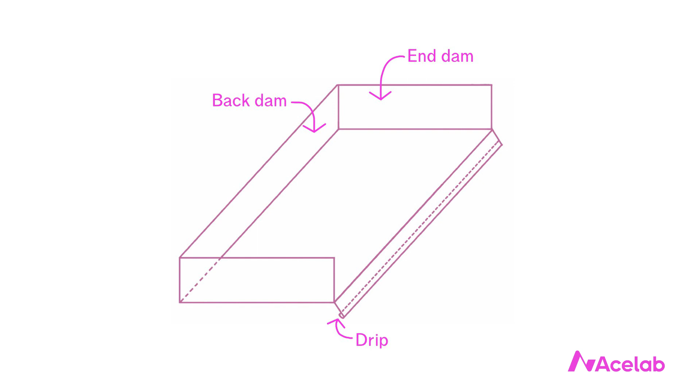First, what is a metal sill pan, and why do we use it when detailing windows? A metal sill pan looks approximately like this. It's a shape we make out of metal. Usually we make it out of a single flat sheet of metal that we cut and bend into this shape. The parts that we bend are obviously continuous and watertight, but the parts that we cut obviously are not. We usually smear these metal to metal joints with sealant, or we solder them to make them watertight.

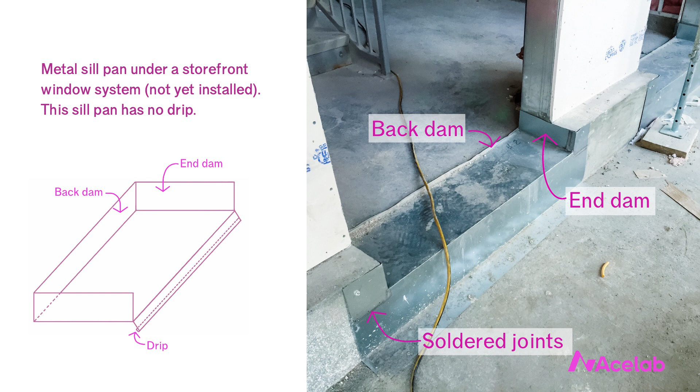What we're left with is a pan of sorts with a back dam, 2 end dams, and a drip edge. We place the pan into the bottom of framed openings before installing windows. Sometimes if our window is flanged, we won't have that angled drip edge. That outermost bend in the metal will just sit flat, flush with the sheathing.

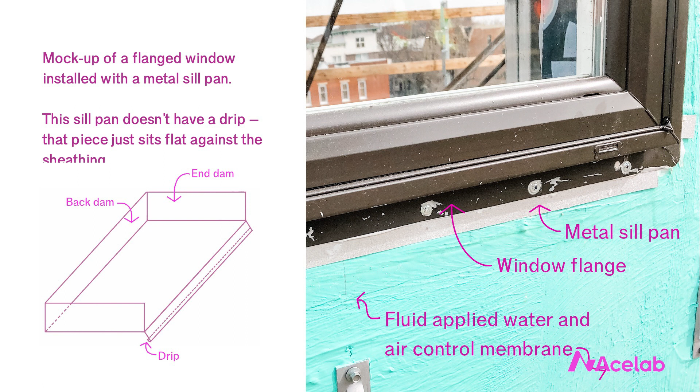The purpose of the metal pan flashing is to protect the framed opening at the sill from water damage from a leaking window. This is a really important distinction to make. This is about the opening, the window to wall interface, not the window itself. If windows didn't leak, we would not need to protect the framing from water damage. But windows do leak, and it's silly and unproductive to pretend otherwise.

Window manufacturers, even of high-performance, expensive windows, don't actually claim that their windows don't leak, at least not formally. What they claim, accurately, is that their windows meet certain water holdout performance criteria when tested in a laboratory. And that is a very different claim. Windows have a lot of complicated internal joinery that's difficult to seal even in factory conditions. And this same joinery can get stressed during transport to the job site and also during the actual installation of the window into the rough opening.

Even after the window has been installed, it sees a lot of abuse in service. It'll be exposed to wind, rain, UV, birds. It's not unreasonable to anticipate that any one of these things would cause a window to leak. And that's just the window itself. The window to wall interface can also leak. Windows are installed by real people who don't always do their work absolutely perfectly. We're installing windows in openings that aren't framed perfectly, using materials and methods that are sometimes a bit unfamiliar to us, in conditions that are sometimes difficult and unpleasant, like wind and rain.

And even when we get that window to wall detail right, what are the odds that it will remain perfect throughout its entire service life? A service life that, let's be honest, never looks quite like the laboratory conditions that we tested the window to originally. The best details and the best architects anticipate all of this. They don't depend on perfection in the manufacture, installation, or maintenance of the window, or in the environment to which it's exposed.

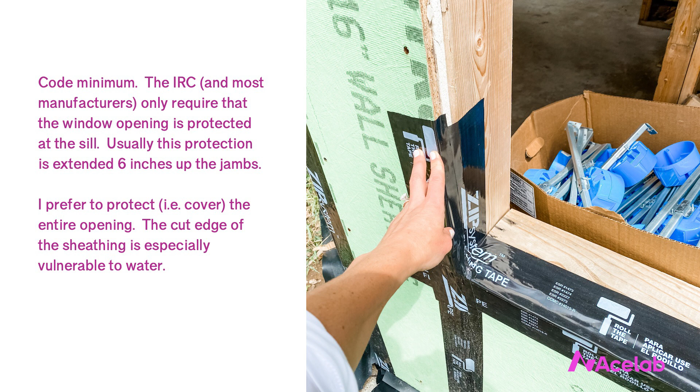It's worth noting here that the building code currently only requires protecting the openings into which we install windows at the sill, and the language about how we go about doing so is pretty liberal. Along the same lines, manufacturers, both of windows and of water control membranes, tend to stick with this minimal recommendation of protecting just the sill. This is fine as far as a minimum standard goes, but I recommend protecting the whole opening from water. While the sill is certainly the highest risk spot, the whole opening is vulnerable, especially the cut edges of the sheathing.

As an aside, protecting the whole opening is also beneficial from an air control perspective. In North American construction, we're often using the water control membrane over the sheathing to also control air. Bringing that membrane to the interior on all four sides of every window opening facilitates continuity in our air control system. And that has all kinds of other efficiency and comfort benefits. But that's a bit beyond our scope today. Back to metal sill pans.

Do they work? Yes, they've worked for a long time. But I submit that using a flexible membrane to form the shape is easier and less risky than forming the shape with metal. This is a complicated shape to form, and even when we do a reasonable job of it, it still has some pretty big drawbacks. For one, a metal sill pan will always be smaller than the opening into which we install it. It has to be, otherwise it wouldn't fit.

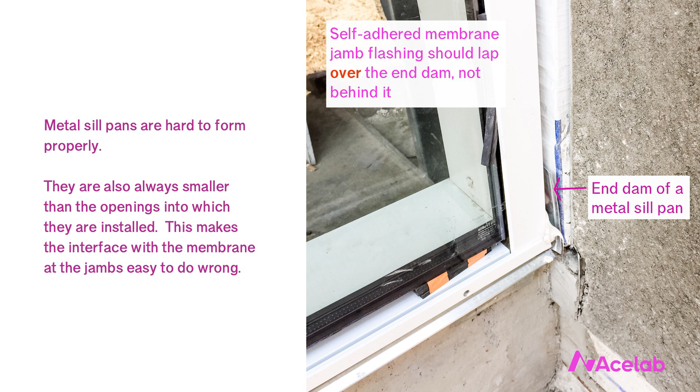The problem with that is that it is very common to forget to lap whatever we're doing at the jamb into the sill pan. It's very common to instead drain the jambs behind or under the metal sill pan, which of course defeats the purpose. A membrane sill pan, by contrast, tends to be more forgiving.

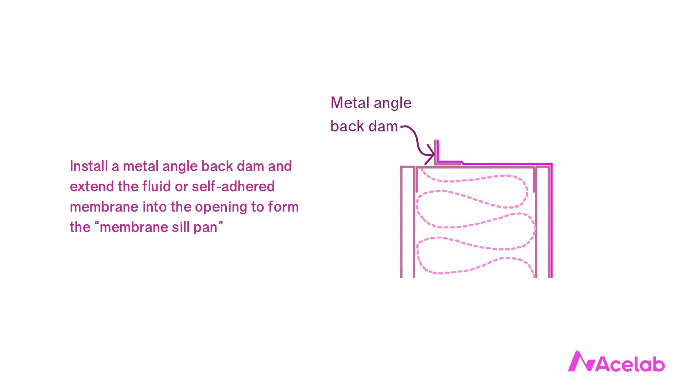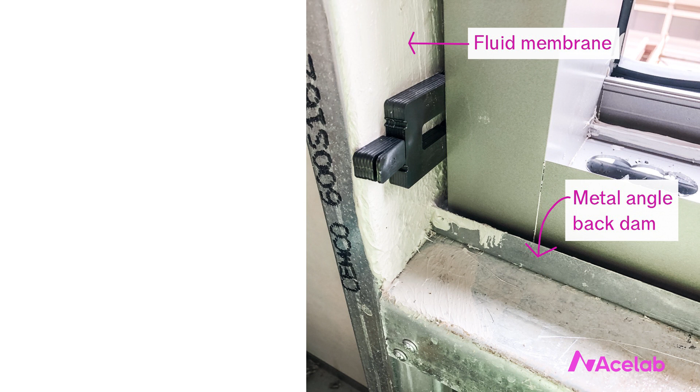We first install either a metal angle or a wood nailer into an opening at the sill to serve as a back dam. And then we use a membrane to form essentially the same shape as our metal pan flashing. The difference is it tends to be much easier to conform to the actual geometries of the opening with membrane rather than metal, and the jamb flashing and sill flashing can be continuous.

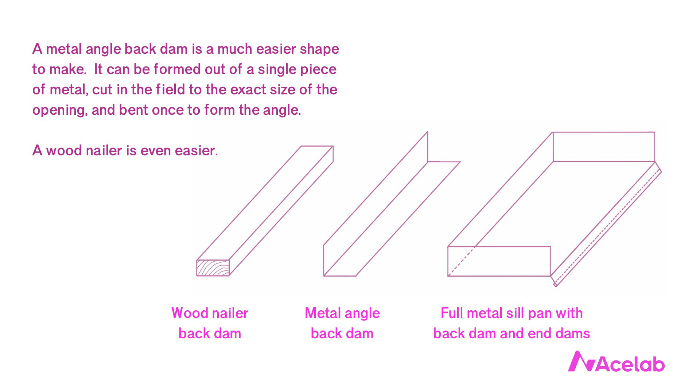Note that metal sill pans are often fabricated off-site. A metal angle back dam is an unbelievably easy shape to make, and it can be made on-site by taking a single piece of sheet metal, cutting it to the exact width of the opening, and bending it once. A wood nailer is similarly simple. The risk reduction by itself is worth it in my opinion.

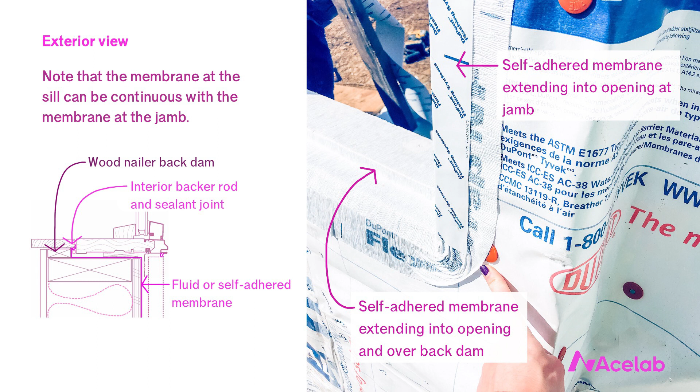But if you need more reasons to like membrane sill pans, they also facilitate better air control continuity because when we install our interior air seal at the window, it's between the window frame and our membrane air barrier rather than the metal sill pan. We also get to eliminate one more thermal bridge.

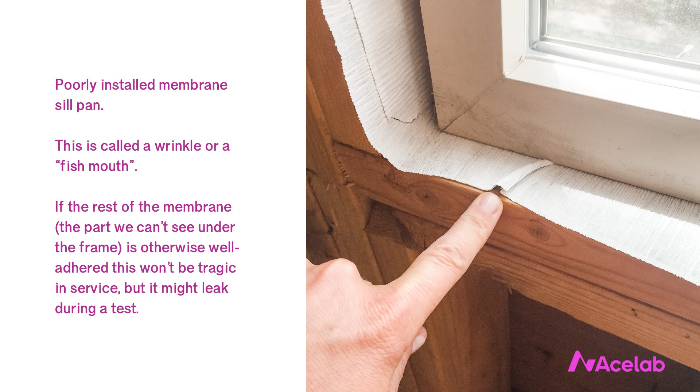All this said, membrane sill pans are not magic. It is, of course, possible to install them poorly too, and there is no question that a competently installed metal sill pan is far superior to a poorly installed membrane sill pan. But I do think it's important to note here that there are a couple apparent drawbacks to membrane sill pans that are, in my estimation, exaggerated.

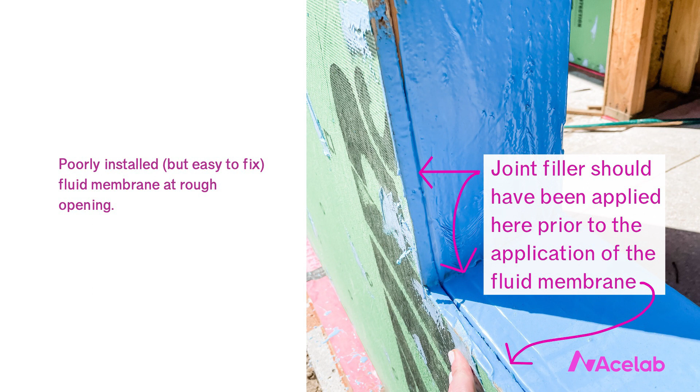The first is that the membranes we might select are incapable of spanning the small gaps in the framing. For example, the joints between the cut edges of the exterior sheathing and the wood studs. Before I ever saw fluid membrane used on a real project, that's exactly what I thought. I was comfortable with the use of self-adhered membranes. We use them to bridge these kinds of small gaps created by changes in substrate all the time.

But intuitively, it just didn't seem like a fluid membrane could do that. I guess maybe I was thinking of like regular paint, but our modern fluid membranes are manufactured specifically for these types of applications, and they're great at spanning these types of small gaps.

Depending on the fluid membrane you select, larger gaps often need to be pre-treated with a joint filler prior to applying the membrane. So yes, definitely something to pay attention to, but no, not an inherent flaw to that approach. It's also very easy to inspect the installation for continuity after the fact, and defects in need of repair are pretty obvious.

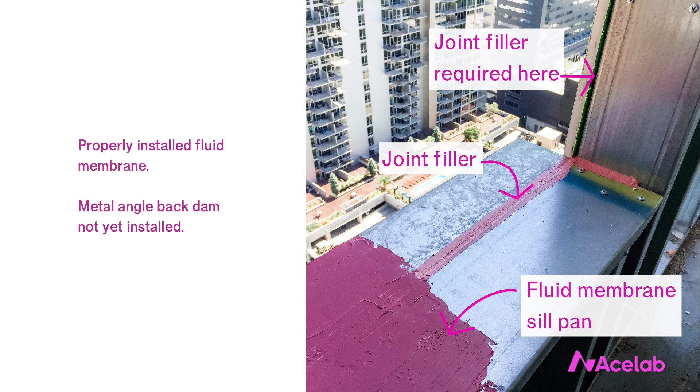A second popular apparent drawback is the idea that membranes are less durable than metal. And here again, I can see the intuitive appeal of a more traditional metal. A lot of high-end homes will specify copper sill pans, for example. They might also be specifying solid mahogany windows that they expect to last 100 years. So again, the appeal of metal is obvious.

And that said, it's a little unfair to compare the performance of copper sill pans in historic buildings with copper sill pans in new buildings with modern HVAC systems. When we keep interior conditions to modern standards of comfort, the thermal bridging you get with a full metal sill pan is not so much an energy issue as it is a durability issue due to repeated wetting from condensation.

It's perhaps also helpful to point out that on these same types of buildings, we routinely install Grace Ice and Water Shield under slate roofs or under copper roofs. We don't install 2 layers of copper. We're typically pretty comfortable using membranes and fluids in other parts of these buildings.

And speaking of roofs, we can expect a service life of 20 to 25 years out of a typical EPDM roofing membrane that's fully exposed to UV and temperatures of 180 degrees Fahrenheit throughout its entire service life. So while we can't know for sure precisely how durable these membranes will turn out to be, I don't think it's unreasonable to expect a 100-year service life out of a fully adhered or fluid membrane installed at a window.

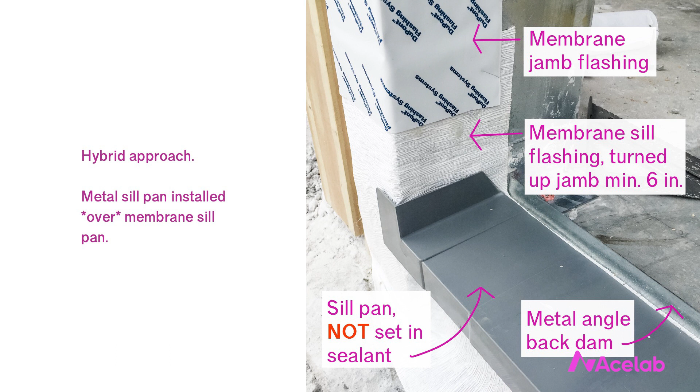And it need not have end dams or a back dam. The one I'm showing you here has both. It certainly would have been my preference to omit these for better continuity in the air barrier, but I don't always get my way, and it's still a beautiful installation.